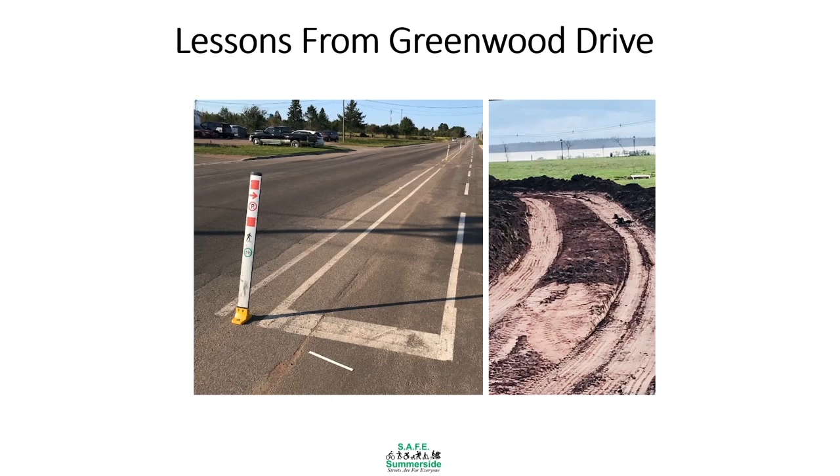The new east-west housing corridor is looking to incorporate an AT pathway. This is the first time in the history of Summerside that a new street is being designed with AT in mind. We certainly applaud and congratulate and are really enthusiastic that this is happening. So in our mind, let's do it right the first time. Let's base this new AT pathway on best practices, on what is working. And what better way than to look at the Greenwood Drive AT pathway and take the lessons we have learned from there and apply that to the east-west connector.

So there are three key questions that each of us need to ask ourselves as we begin this presentation. And if you answer yes to these questions, then please really pay attention to this presentation, as there are some key changes that Safe Summerside would like to see.

The first question is, will there be new intersections created as a result of this new corridor? The second question, will there be streets and subdivisions connected to this corridor? And the third question, is there going to be more housing and more population growth living around this corridor? If you answered yes to these questions, then it's time to pay extra careful attention.

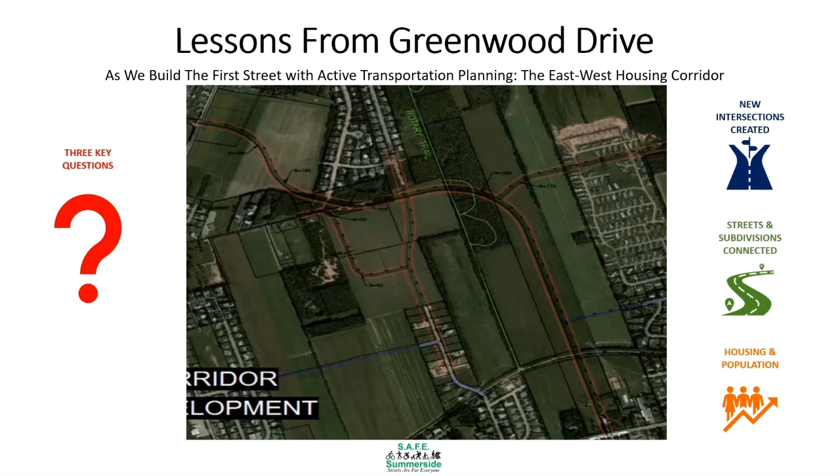First, I want to thank the city for quickly responding to some previous concerns that we have had. On the March 23rd council meeting, we addressed the issue of the storm drains, which were placed parallel to the flow of traffic when they should have been perpendicular. Otherwise, it would have serious results of a tire being lodged and you going head over shoulders.

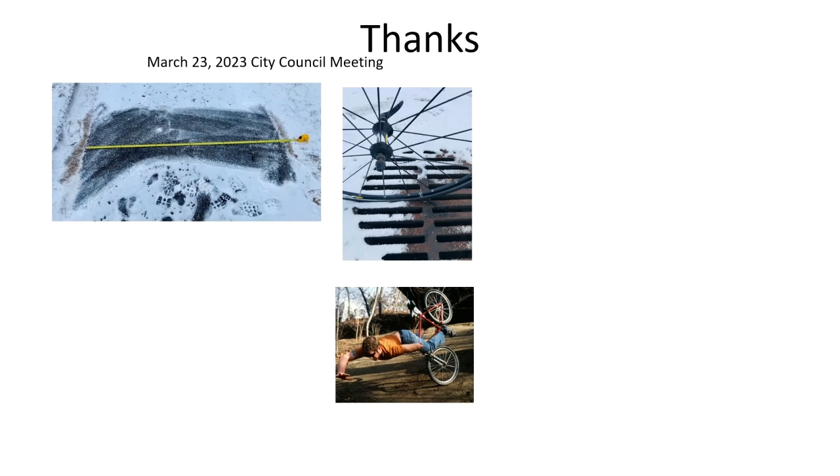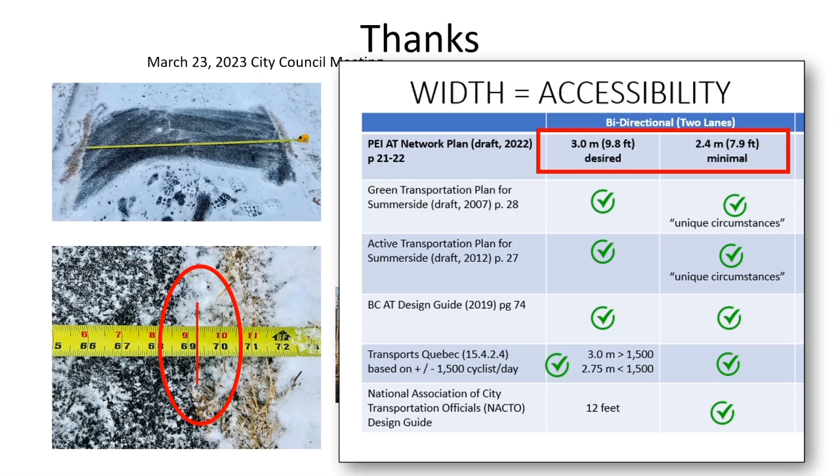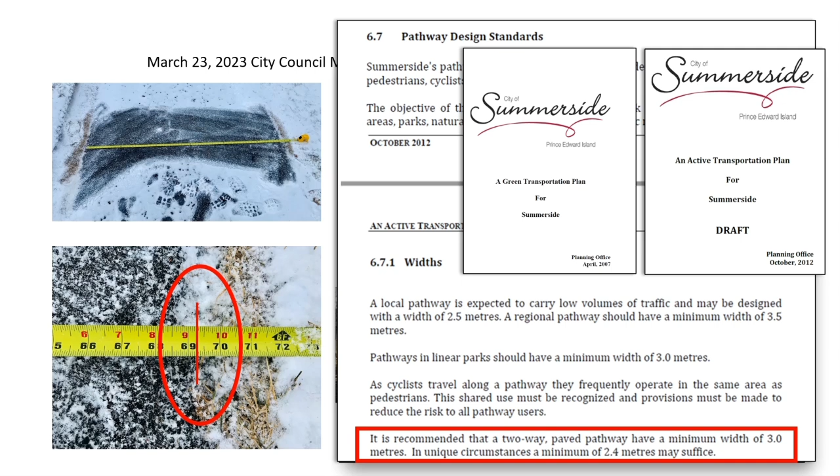We also addressed the issue of the width of the Greenwood pathway. It was below the minimum standards. As we can see, the minimum standard is 7.9 feet, and this was less than 6. According to the City of Summerside's own documents, two draft documents actually, this is below their minimum standard, which they state as 2.4 meters, again 7.9 feet. And the city went to work. They increased the width of the Greenwood Drive AT pathway, and now it looks like this, and the minimum standard has been met.

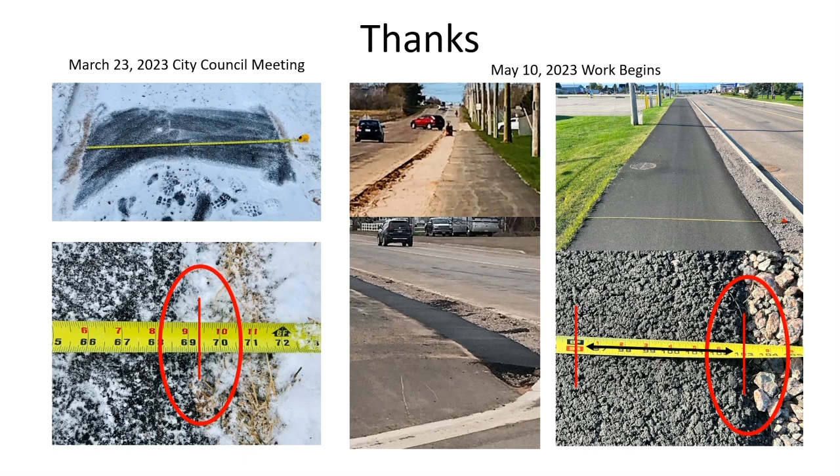So the core of this presentation is to highlight bidirectional versus unidirectional pathways. Basically like Greenwood Drive, which is bidirectional, two lanes on the same side, versus unidirectional, which acts sort of like a shoulder of the road in which it travels with the flow of traffic.

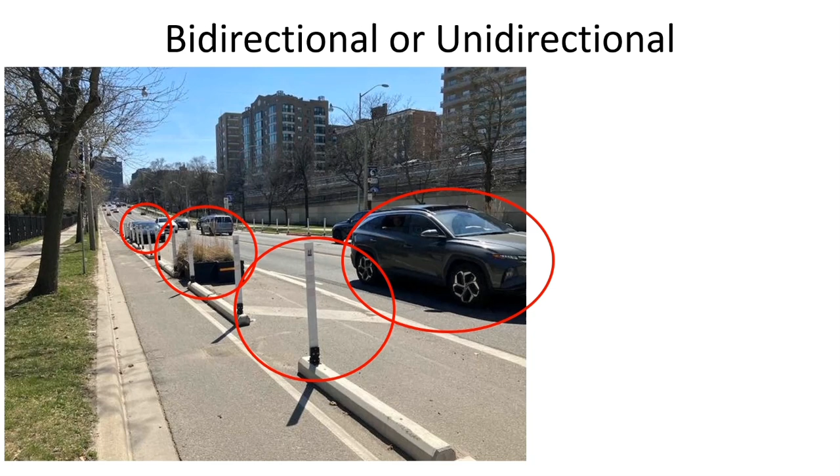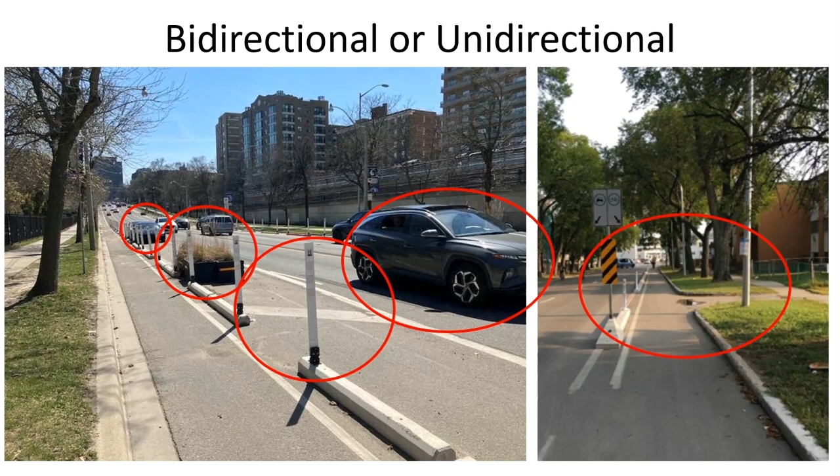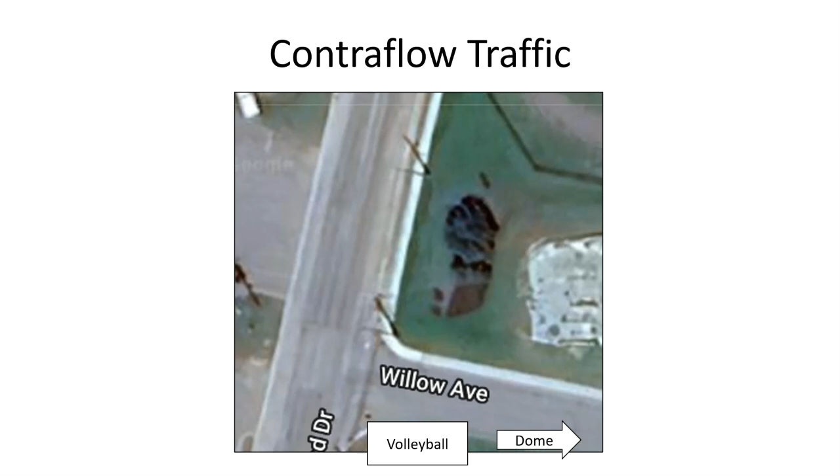So the key reason why we are recommending unidirectional pathways and not bidirectional pathways is contraflow traffic. And there is no better way to explain contraflow traffic than to look at Greenwood Drive. Let's just put us in the vicinity so we know where we're at. The volleyball courts are here and the dome's on this side. We have the turf field and the skate park, as well as Elm Street Elementary.

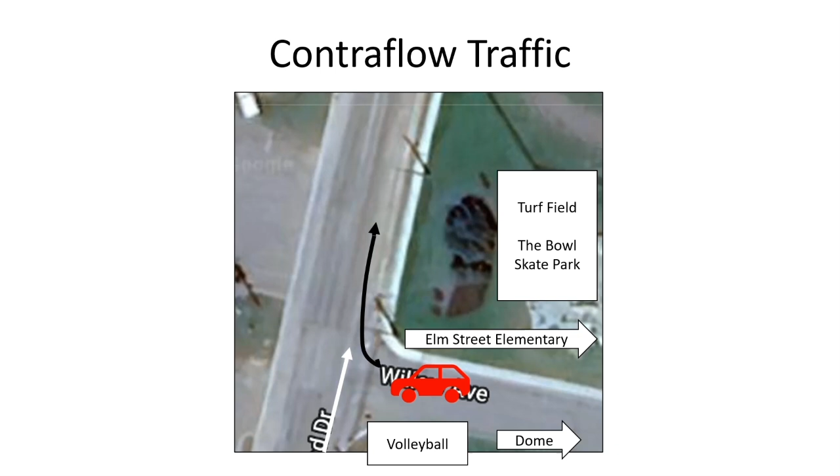Now we have a car on Willow and they're looking to turn right. They want to go up Greenwood Drive. The traffic is moving in the same lane that they're turning into, so there's absolutely no reason to even look at the other lane because they're not going to cross that traffic. They're just going to Greenwood Drive, so there's no reason for them to expect traffic coming into their lane, because they're entering the lane going right and the traffic is moving right. The challenge with a bidirectional AT pathway is that's not all the traffic. Right now the AT pathway is moving contrary to the regular flow of traffic.

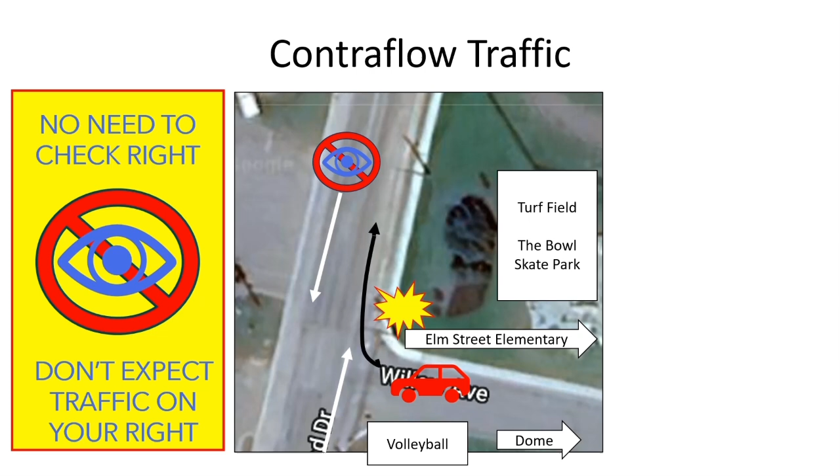This is contraflow traffic explained in detail using a real-life example of Greenwood Drive to illustrate the challenges. This is what Safe Summerside is getting a lot of reports and feedback from our members about what's happening.

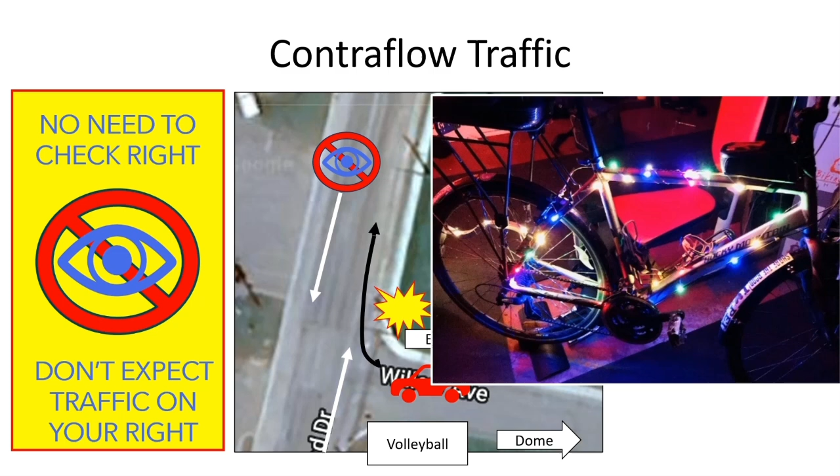On parade day, this is what my bicycle looked like. I went to the parade, I'm at this intersection, my bike looks like this, and the driver doesn't see me. The driver, I would guess, never looked because they didn't have to, because they would not expect any traffic coming towards them on that side of the lane. Unfortunately, I was there, and luckily I stopped before I was hit.

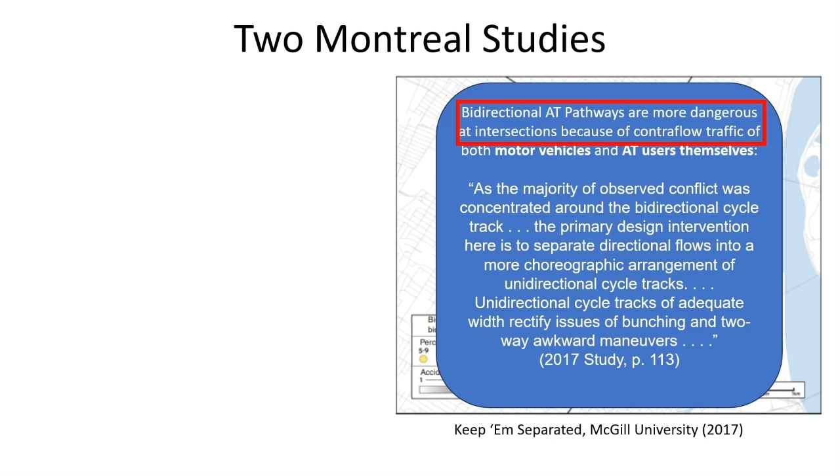So the results of this study are that bidirectional pathways are more dangerous at intersections because of contraflow movement. This is not only with motor vehicles, but also with AT users themselves. The primary design intervention is to create single-lane unidirectional cycle tracks.

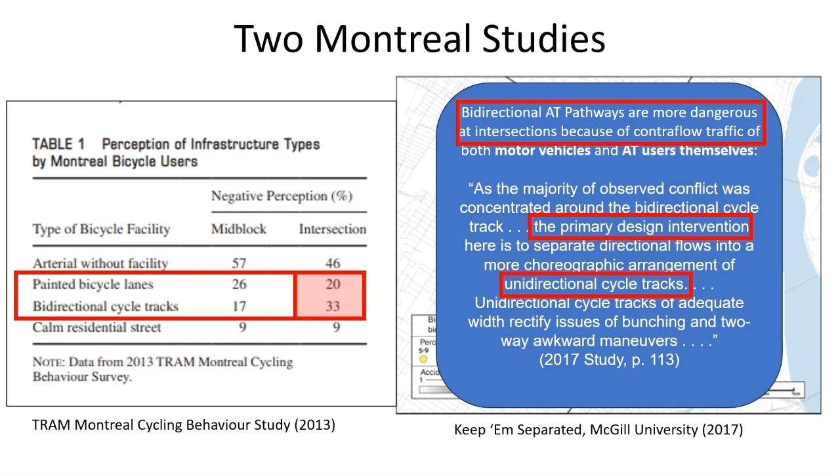In 2013, Transportation Research at McGill also did a study. It talked more toward perception of the AT users themselves. What's interesting to highlight is that 33% viewed bidirectional cycle tracks as being more risky at intersections - more dangerous than just having paint on the road.

And recently, just a few days ago, Montreal is putting back a bike lane that it tore out just 3 years ago. The bike lane that they removed was bidirectional on a street, so right now they're going to put in unidirectional to eliminate all of the contraflow traffic movements.

The final study I'd like to talk about today is from the Insurance Institute for Highway Safety, which found that some protected bike lanes are leaving people more vulnerable. This was a 2019 study based out of New York and Portland, both cities with lots of cycling lanes. The challenge is that in both cities cyclist deaths increased by 25%, with 777 killed in crashes in just 1 year.

They identified factors such as the number of driveways, intersections, and two-way traffic. So the bidirectional again - the risk of a crash or fall in a two-way protected bike lane at street level is much higher than that of a major road. A major road carries its own risk, but if you put a bidirectional at an intersection, it carries more risk. That's what that quote means.

One-way protected bike lanes differed little from major roads in terms of injury risk - there was really no difference using a one-way protected lane, so it was better than a bidirectional. The final quote is that two-way protected bike lanes alongside two-way traffic add complexity, as turning vehicles need to monitor both oncoming traffic and two-way bicycle traffic in the bike lane. So again, let's move away from the bidirectional and look at the unidirectional.

When there are intersections, for example the Bay Walk, there's no intersection, so bidirectional works very fine there. If it had intersections, a different story. If we travel to Charlottetown, we see those corridors going from Cornwall to Charlottetown - those cross very few intersections. So bidirectional on one side, wonderful, inspiring, it's recommended, sure, but not when they're crossing an intersection.

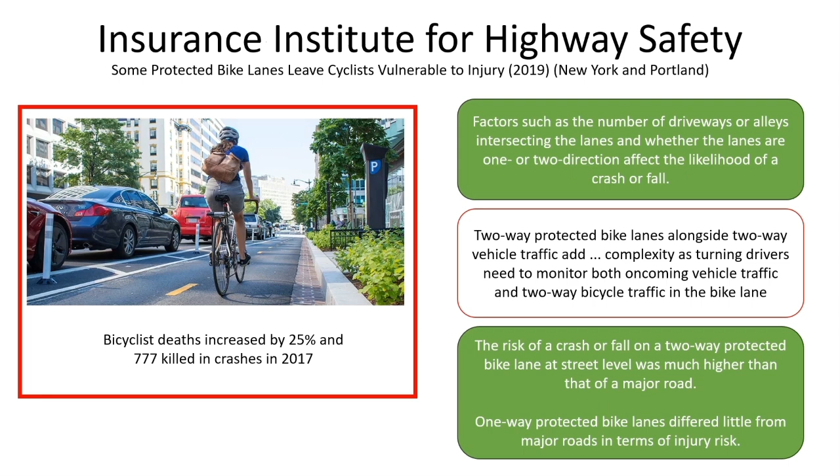Finally, can we reconsider? We're looking at a multi-use path at 3 meters, and again I applaud the city - 3 meters is the desired width. So can we reconsider putting in 2 unidirectional AT pathways at the desired width? That would come in at 1.8 meters each, meaning an extra 0.6 meters.

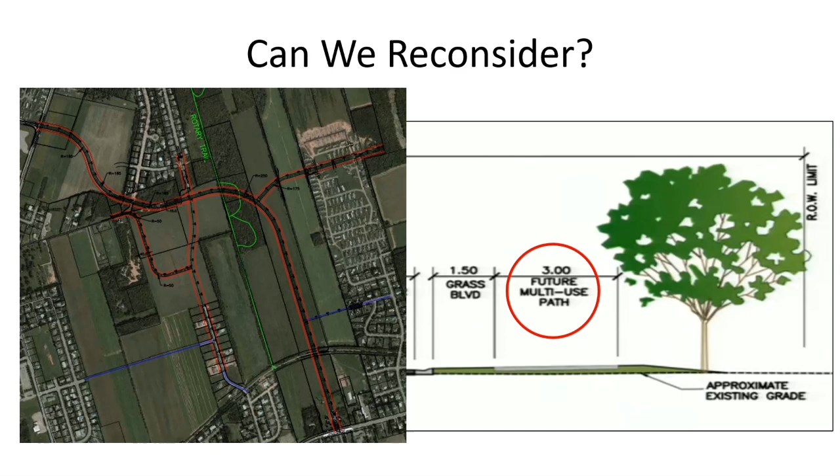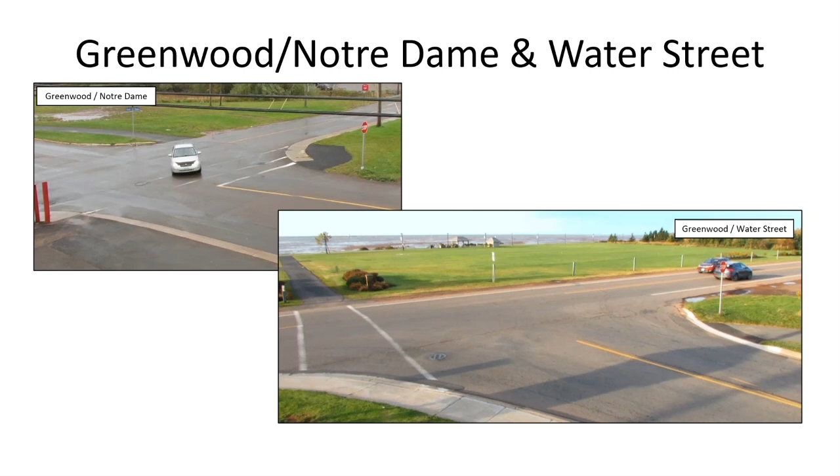If we're looking at other lessons we can learn from Greenwood, this is a key lesson. Right here we have Greenwood and Notre Dame, Greenwood and Water Street. We have two times that we need to cross the street. However, what's happening is we've actually created four different street crossings. So what this results in is we double the risk, going from crossing the street twice to crossing four times, which doubles the risk of collisions. And it also creates a caught-in-the-middle effect.

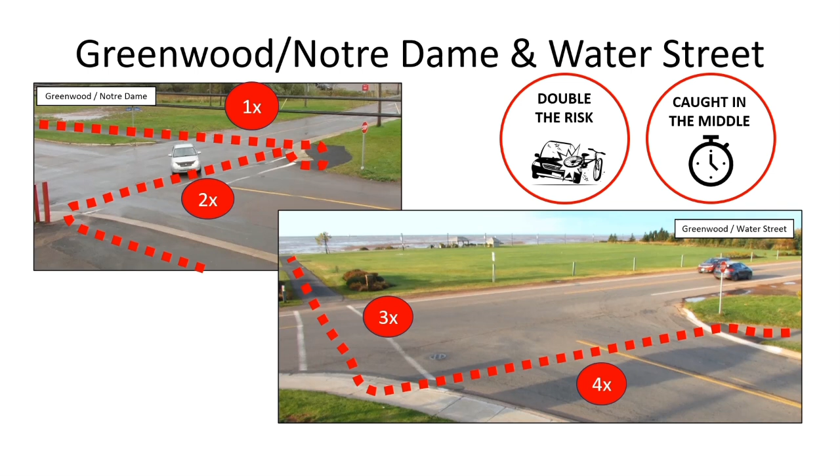In larger groups, this is what it would look like. For myself, I bicycle with a group of 15 children, so it would look like this as we're crossing the street. We'd be in both intersections waiting, and we'd wait for one to clear before we can actually move. So we're blocking intersections, and the feeling of having children caught in limbo, caught in the middle of the street, is pretty unnerving for me.

Something needs to be changed.

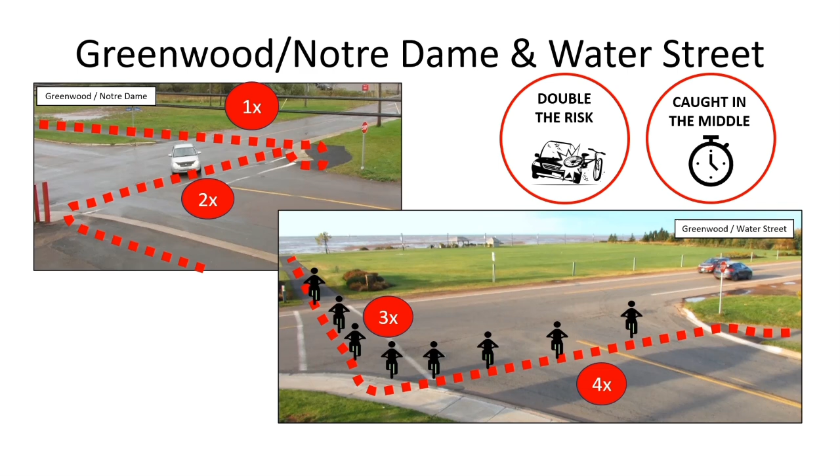At our public meeting we held to discuss this, there was a family of six who also travel quite a bit, for the summer in Summerside, and they find this particular intersection really challenging because where do they put their rig? Where do they put it so they can haul their family, take their children out, take their family? They don't all fit on that small curb. So how can we do this?

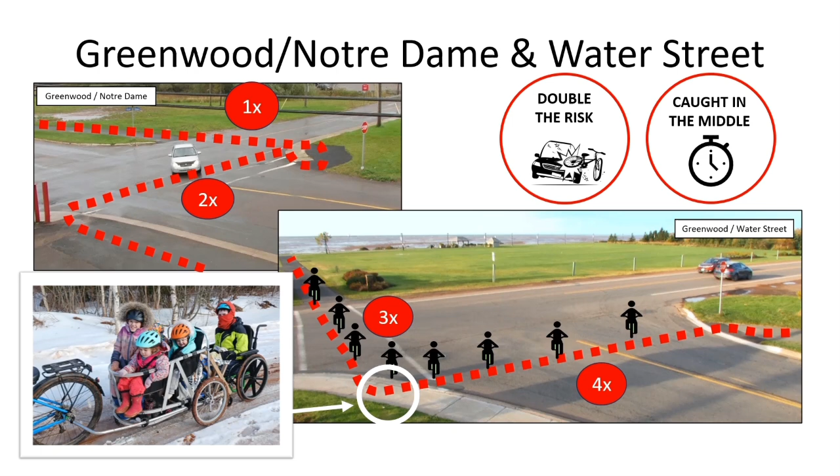In terms of solutions, one is we just create a new unidirectional path on the west of Greenwood Drive. I know that sounds unthinkable. However, bidirectional is not best practice, and I really hope I've illustrated the concerns that this has created.

So what we're looking at, the L intersection, we already have 810 meters that's already paved. And of the remaining 920, it already has 6 feet of gravel adjacent to the road. So no more digging, just lay down the pavement and we're good.

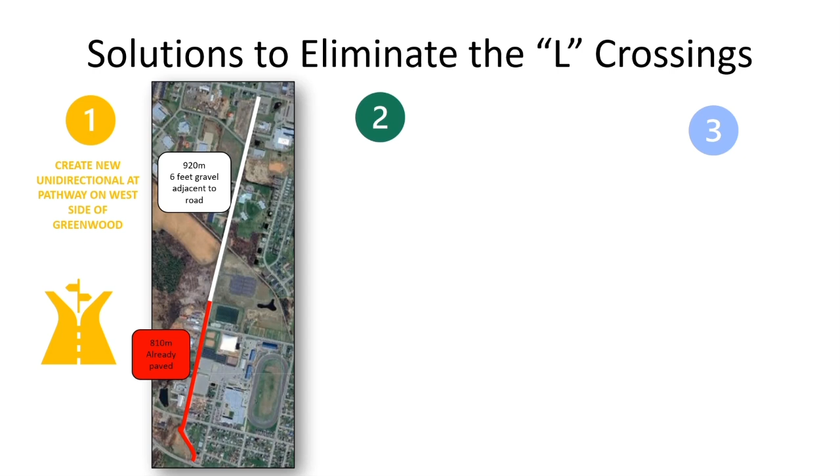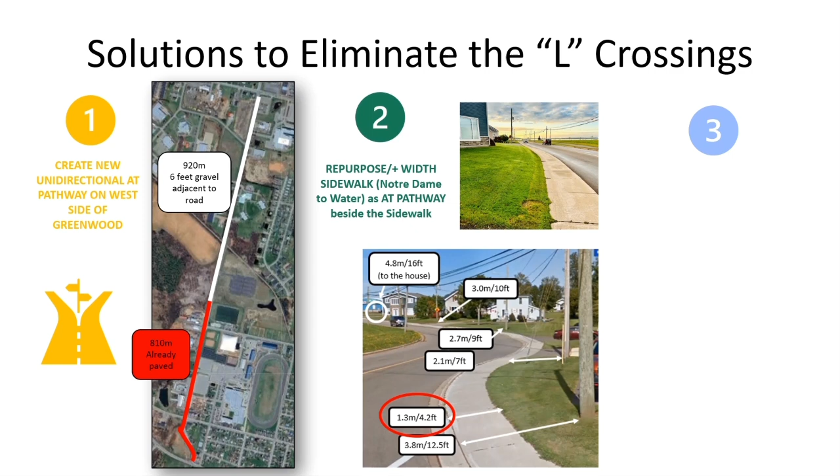The second solution is we already have a sidewalk that goes from Notre Dame to Water. However, let's utilize the other portion. We actually have enough room to keep the sidewalk and add a lane. This really would have made sense to have done in the first place, because we don't want the L section. This would have been more cost effective than putting a bidirectional on the west side of this area, and in terms of being more intuitive and getting rid of the L section, this would have been the preferred choice if we maintain the bidirectional.

The third option is to create diagonal crosswalks. Instead of crossing twice, we cross once. However, in crossing once, we still require all the traffic to stop. And certainly at the public meeting we held, there wasn't very much belief that this would be the best option, and it could be just as risky as well. I'd go as far to say there's only been one time I think Summerside's had such a diagonal crosswalk, and it's been at the Willow Northumberland intersection, and as we can see it's changed from that diagonal crosswalk to just one crosswalk.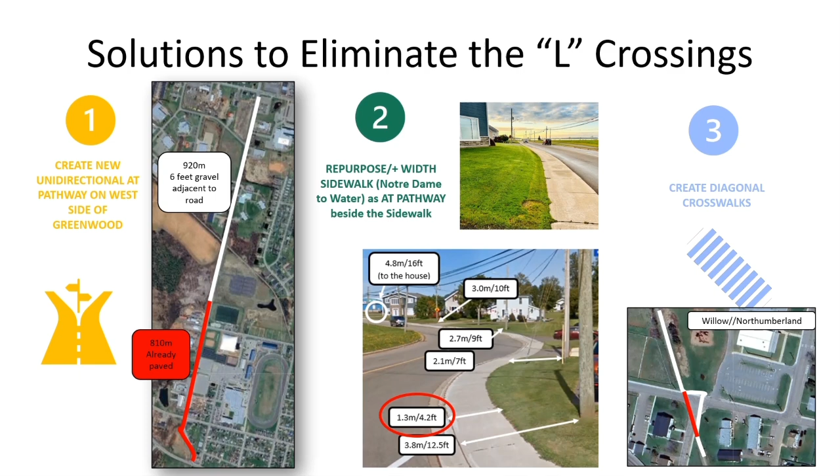Another issue we can take as a learning opportunity is the Greenwood and Willow Avenue intersection. Now, I've already talked about the contraflow traffic. Again, very serious, and I hope we've done a good job illustrating what contraflow traffic is and how it is a concern in a bidirectional AT pathway.

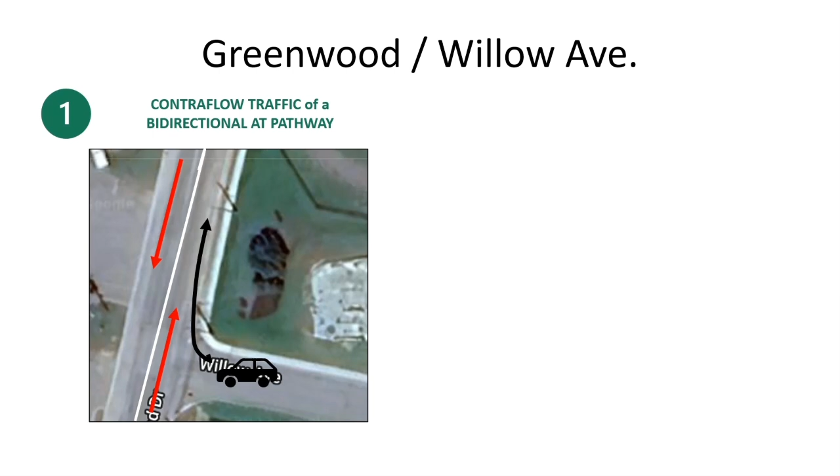However, there's also a second issue with this intersection: the angle of transition from on-street to off-street. There's a challenge there. So if we measure both angles—now taking into account this is done just by a computer, not on site, and we're not civil engineers by any means—here's the angle. If you're looking at a straight line, it's 180, and what we've calculated, which is probably plus or minus for sure because we don't have the tools to be out there on the roads doing them ourselves, is 116.

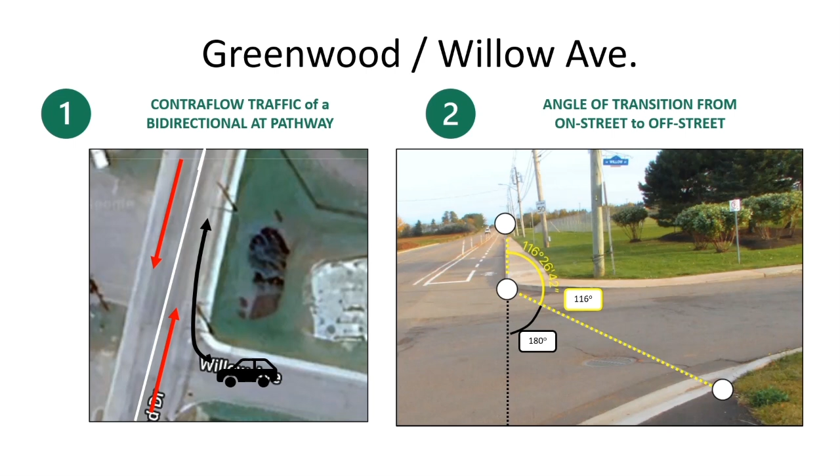So this really illustrates that when you're coming down, as I was, and as the cyclists are, you're literally pushing yourself into traffic. This angle pushes the AT traffic into the motor vehicle lane, and what happens is this creates a risk of collision. This is not a good recipe.

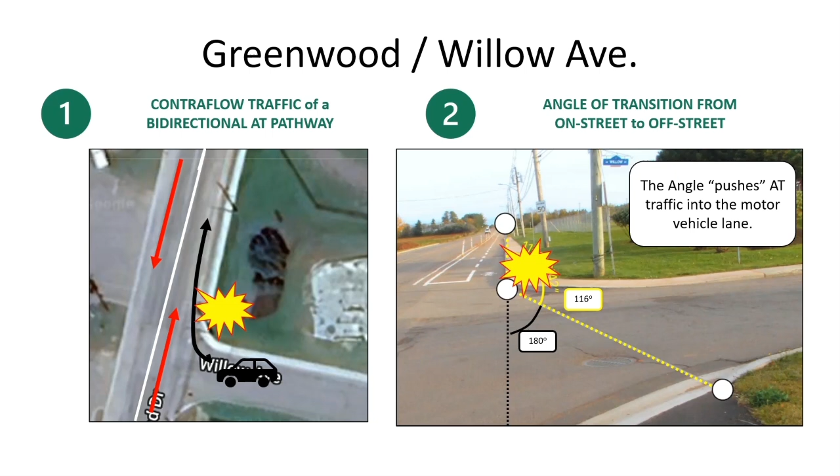So in terms of solutions, we have a few options. One, again, we're going with the unidirectional - I know it's a theme, but that is one solution, a best practice that can get it done. The second is to move the curb to align, so we get rid of the angle. If neither one nor two are options for the city, the third would be signage and paint.

Although it doesn't protect, it does help to educate. By painting it, we need to clearly identify that this is a protected zone, that this is an AT pathway, and that would help bidirectional, if that's what we're going with here.

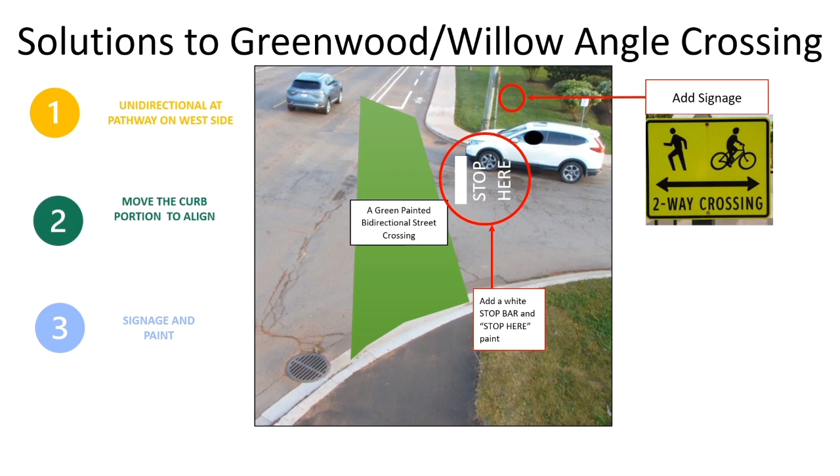Add a stop bar and stop here paint - it's done elsewhere in the city, and it certainly serves as a reminder. We also need to add signage that says to look both ways when approaching, that you have two-way crossing, two-way traffic. Now, granted, the paint won't be seen at nighttime, and the signage will only be seen if there's a light there. As we've often said, paint and signs don't protect, but they certainly serve as a good way of education, and it may help a little.

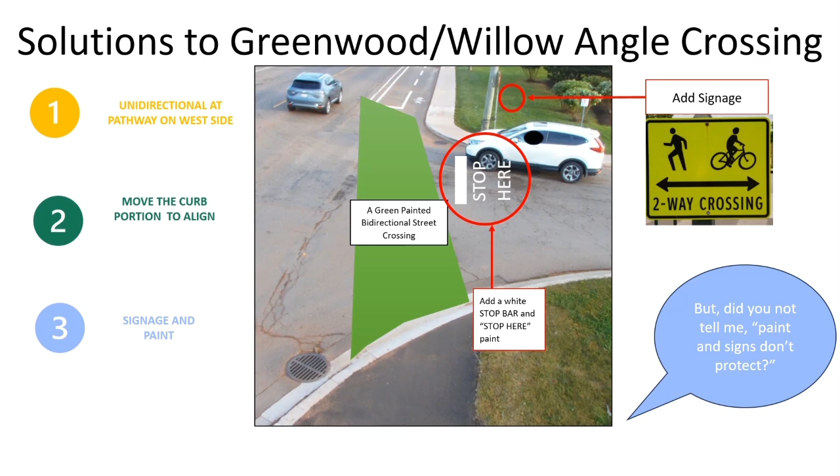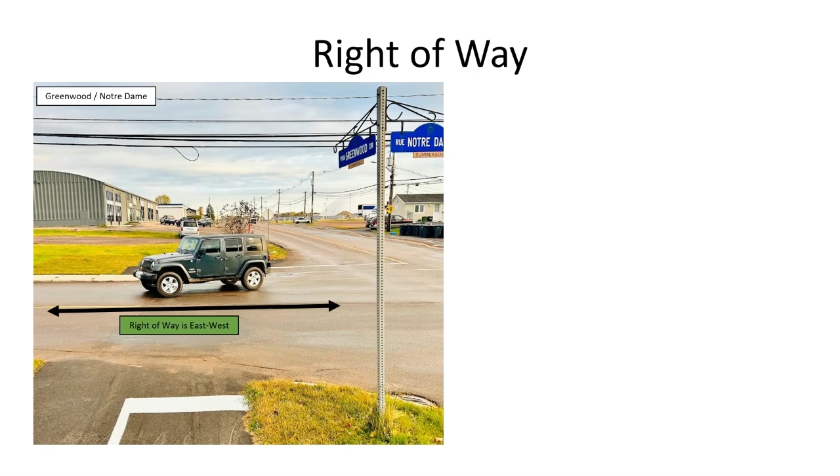There also seem to be some right-of-way issues on this street. Looking at Greenwood and Notre Dame, traffic goes east to west, and the stop should be here because this is not the flow of traffic, so the AT pathway should stop there. That's our understanding of the correct use of right-of-way.

On Greenwood and Willow, which is consistent with every intersection or parking lot, the same rule applies to the AT - even though the right-of-way is north-south, with traffic going up and down Greenwood Drive, what we have here is a stop. So the AT traffic comes to a stop, much like a stop sign. They stop, so they don't have the right-of-way. That's what the signage is telling us, and we don't believe this is consistent with proper rules of the road.

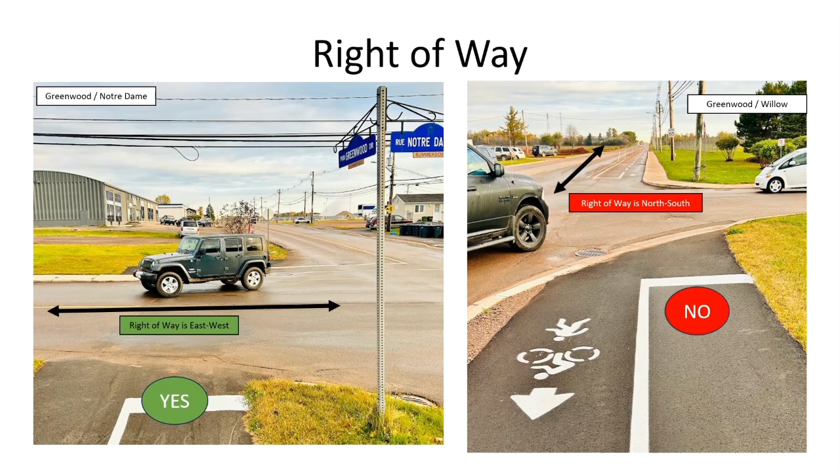Because if this is a shoulder, per se, without an AT pathway - a shoulder with, say, a cyclist on it - they would have the right of way to continue. They would not have to stop and yield to traffic turning in this manner. So we would recommend this is not an appropriate use of the right of way, that this should not be a stop for the AT traffic. The AT traffic, as well as all traffic traveling north to south, should have the right of way, and the traffic coming from Willow are the ones that need to stop.

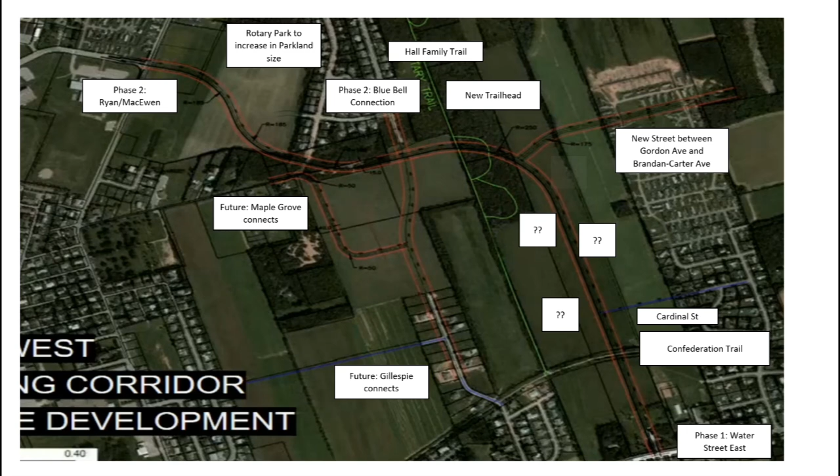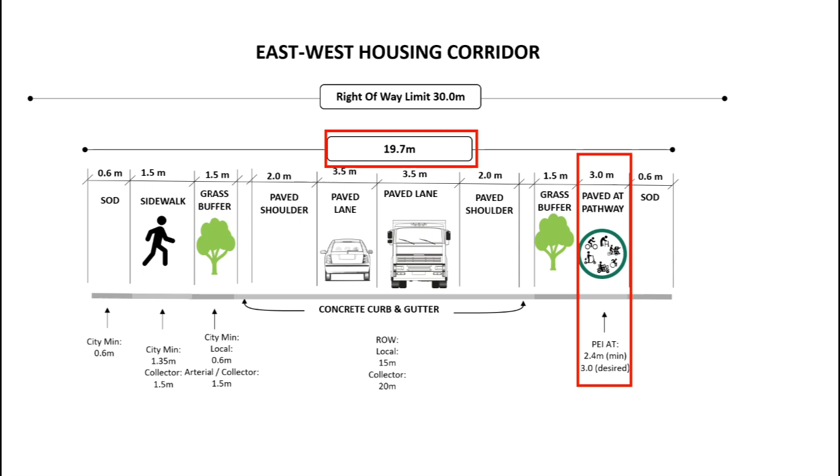In summary, I hope I've done a decent job explaining the inherent challenges with a bidirectional AT pathway when many intersections are considered. Here's what the city is proposing: a 3-meter bidirectional pathway, occupying a total of 19.7 meters of the available 30 meters.

Now for Safe Summerside, here are our recommendations. We would add 1.8 meters on each side for a unidirectional pathway. We will increase the grass buffer by 0.5 meters on each side - more of a buffer between the AT traffic and motor vehicle traffic is best practice. We will also add another buffer between the AT pathway and the sidewalk, again best practice, because we don't want pedestrians to get hit by, say, speedy e-scooters or speedy e-bikes. We want that separation built in.

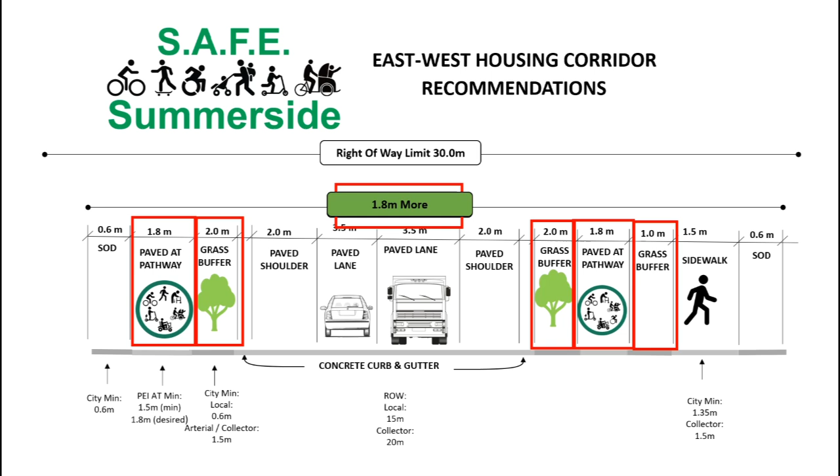So that brings the total usage under our plan to 21.5 meters, a 1.8 meter increase from what the city has recommended. This difference seems definitely doable, since there's a total of 30 meters of right-of-way width available. So we respectfully submit this to city staff as well as city council for their consideration, and encourage them to reconsider the bidirectional AT pathway and build a unidirectional AT pathway instead. Thank you for your time.